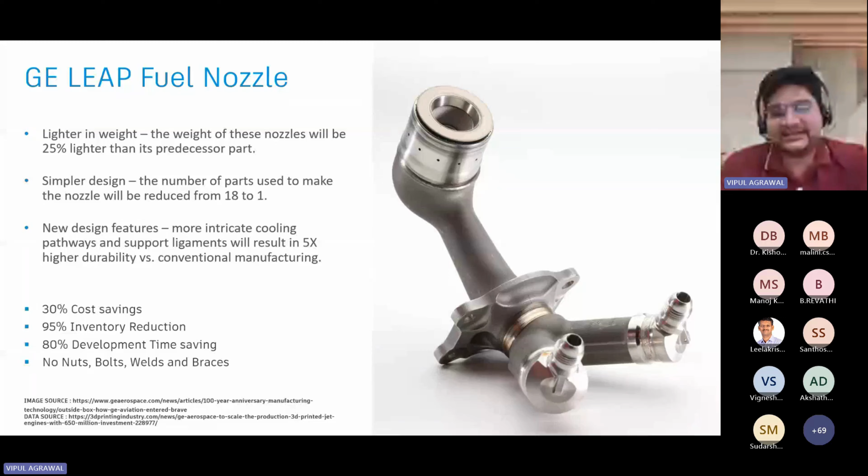And then that is where the industry started thinking about generative design. Industry started thinking about additive manufacturing, right? And at that time, I believe, in the mainstream, the fourth manufacturing process was added as a common manufacturing process. Every one of you might have heard about all the other three.

The casting process, which we say is kind of an additive process also, but it's just pouring molten metal into a mold. The forging process, which is the zero or neutral process, as we call it, which is just shaping the metal out of what you have. And then the machining process, which is the subtractive process, which takes out the material from the regular block. And then the new age additive process, where we settle the material layer by layer, right?

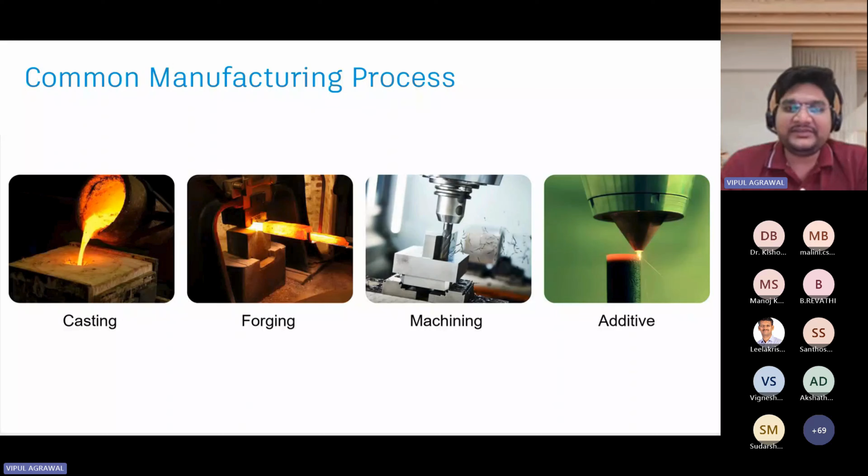And why was this becoming more and more aggressive and more famous in the industry? This is because of these five reasons which have been mentioned here. One was sustainability. Since you are not removing material, you're adding up the material, you're using approximately the equivalent material, and not wasting anything. This was again a sustainable move, and it was very much beneficial for the industry.

Shorter production lead times were there, the material usage was reduced, and the spare parts were reduced also. The performance of the parts was able to improve because now they could implement the designs in such a way that the new features, the new functionalities which were not previously possible, can now be manufactured. And then it was decentralizing the manufacturing from silos to the whole world. The manufacturing machines were the new age machines which were coming up in every industry.

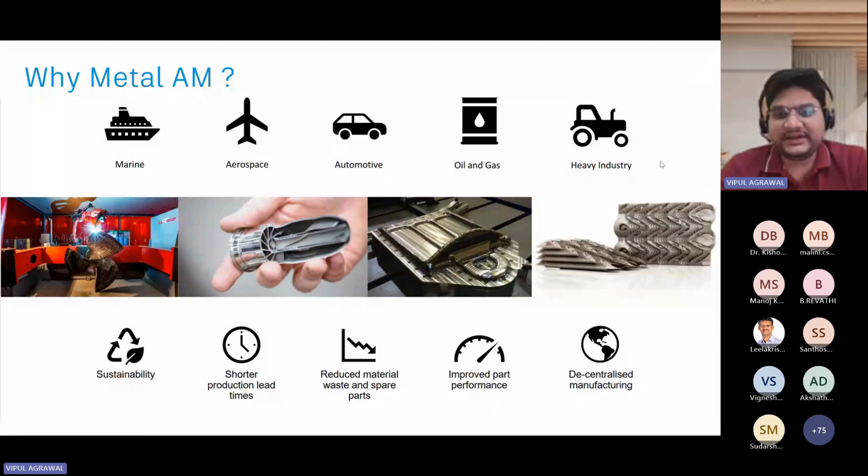Now, apart from this, if we look at the designer side of benefits, the designer was specifically able to produce more complex geometries, right? That would improve the part performance. They were able to make simple geometries which were combined together and not made in different parts. Again, the weight of these geometries was really low. They were fully customizable, and parts could be produced with minimal extra material or effort, like no tooling is needed, no fixturing is needed, and those types of things.

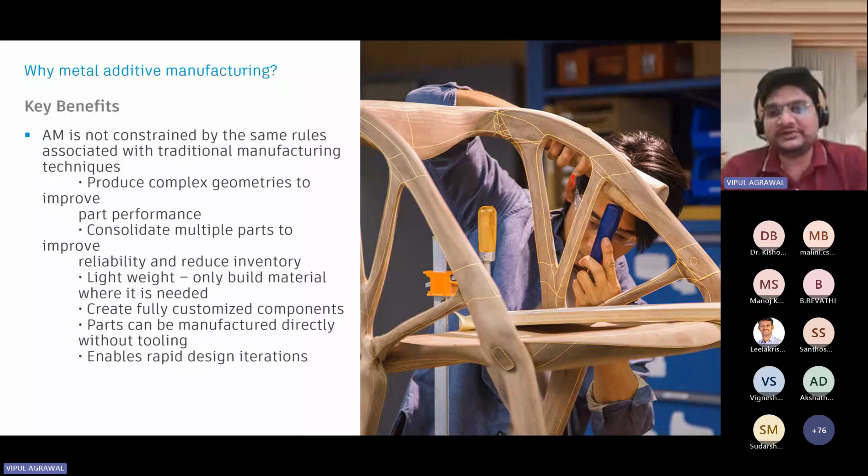And the other thing was you can do rapid iterations on it. These were the key benefits from the designer's perspective, through which they were able to make new and better designs than any time before.

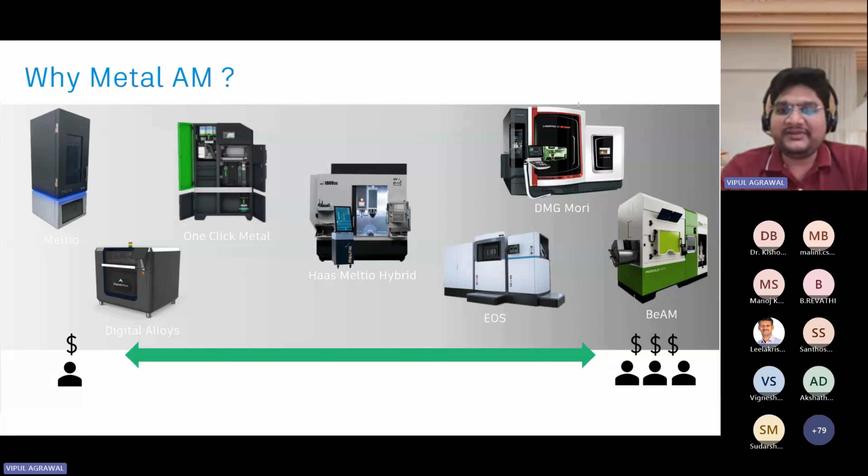And another thing was the era of making additive machines simple also got started, because previously the additive machines were bigger, bulkier, and costlier. While now, the additive machines have gotten smaller, desktop based, even some metal machines that you can install at your homes as well. So within these 10 years from when I was introduced to additive manufacturing till now, this makes right now a very good time to start working with additive manufacturing completely.

And what is required for doing it? So we saw the benefits and everything, but because of those benefits, because of those things that have changed, there is another new aspect that has come up: the designs are getting complicated.

And as far as a designer, while I have the flexibility to design it, I need new type of education, new type of goals, new type of understanding to make these new designs. And that is where design for manufacturing comes into picture. Once you have selected the process, the manufacturing style you want to adopt, now you design for it, and you have to specifically think in that direction, because that is what is going to get the design into real life afterwards.

And when we adopt design for manufacturing, there are again various benefits that we get, because the manufacturing has been thought of even before the starting of the design. The quality of the designs gets improved. The cost of getting the designs wrong or redoing them gets really low. So the costs are reduced, the qualities are improved, and due to this, the time to market of your products also improves.

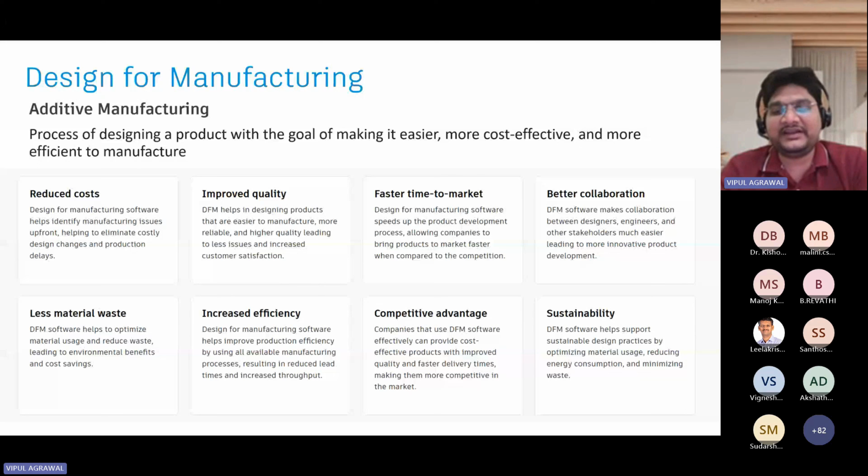And when we think about design for manufacturing in additive terms, there are basically three types or three styles of designing that come into picture. One is the standard topology optimization that I think most of you might have used till now. The second one is lattice structuring, and the third one is generative design.

So, in simple terms, topology optimization is getting to know what are the areas of the material where there is no use of any metal. So, it does a basic stress test on it. Wherever the stress is not acting, you can remove the material from there and optimize the topology.

Lattice structuring is where you can do a lattice structure for the inside of the part, so that it is fully solid from the outside but hollow from the inside, with some kind of structuring which can sustain the load cases which are already there. And then the third one is generative design, which we are going to see in detail. So let's start

now discussing how generative design would help you to do goal-based designing for additive manufacturing. But again, I'll repeat what Santosh has told: if you have any doubts, any questions regarding the concepts, or why we are discussing generative design and additive manufacturing, you can start putting them in the chat, and we will take them up at the end.

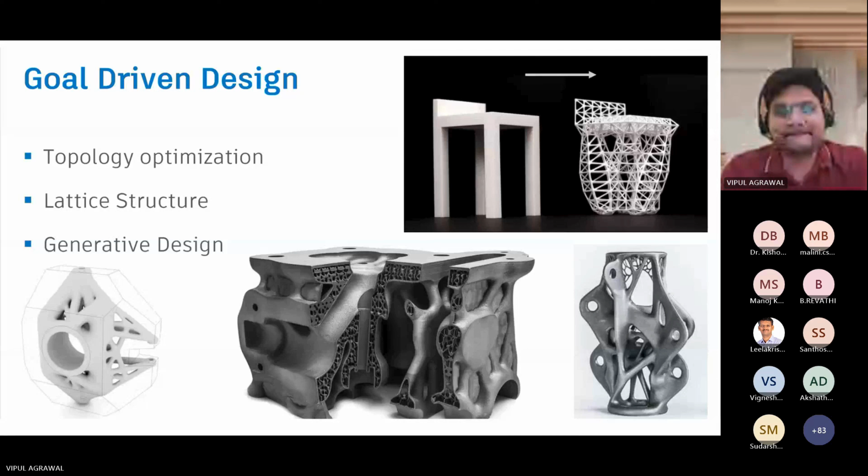So we heard additive, generative a lot right now, but what is it basically? Generative design is nothing but a design exploration technology. With the given set of inputs, it will give you CAD designs, and with those CAD designs, as a designer, your job would be to find the right fit for yourself. Now, what are these inputs and how are the designs presented? That is something we'll see.

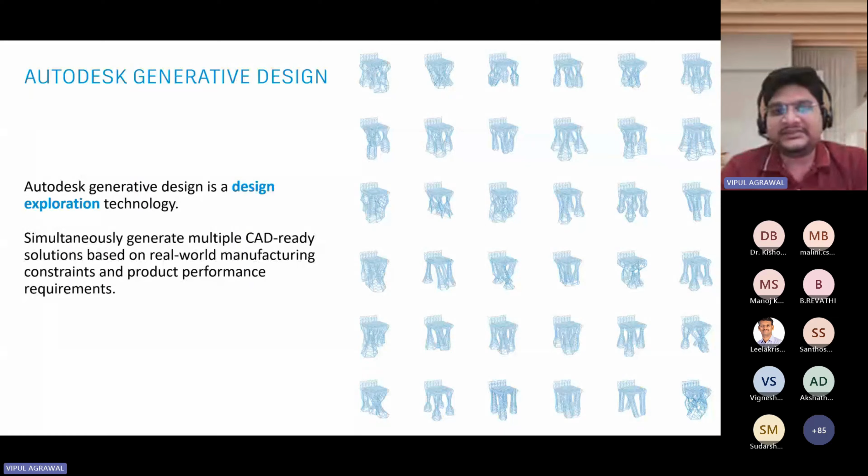But first of all, let's take a step back and see how design processes are done today. In the design process, a few concepts are made, and then these few concepts are validated. In this validation, they check how the performance of these concepts would be, how the manufacturability is, and everything. And once validation is done, they go for mass production.

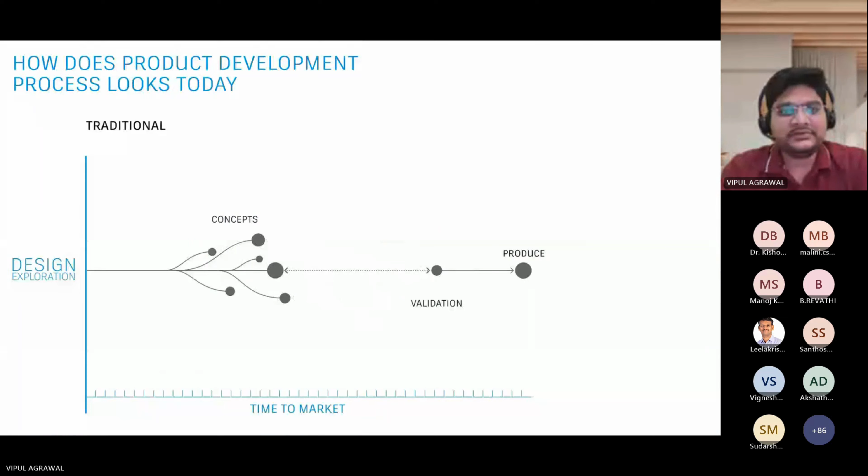A designer can design it in, let's say, 10 hours, 12 hours or something, and he or she can design only one design in that 10 and 12 hours. But what if there is something which can give you hundreds of designs within that 10 to 12 hours, right? And these 10 to 12 hours which the designer has invested will only be given to a design which is manufacturable by one method and made by one material type, right?

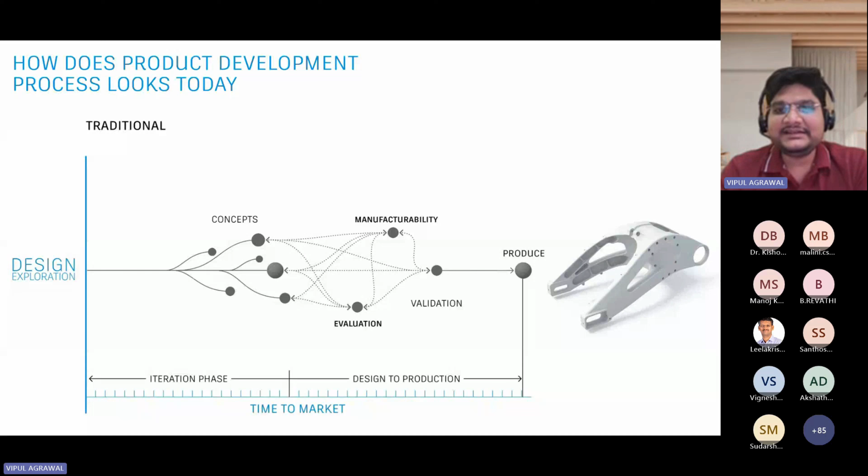What if the material changes? What if the manufacturability changes? What do we do about that? So that is where generative design supports you, right in the first iteration phase of the complete product development process. While you are doing the concepts, it helps you by giving you hundreds of different concepts with the given set of inputs that you have for the product development, and using these hundreds of outputs, as a designer, as an engineer, it becomes your job to go ahead and select what fits best for you, right?

So seeing this, there are basically four areas where generative design can be used. First is to get a design suggestion. Like, I'm randomly sitting, I need to do a design, and what kind of design can I take up. Second is part consolidation. So if there are several parts, like we saw in the example of the GE nozzle, 18 parts combined into one, and I want a combined part of everything.

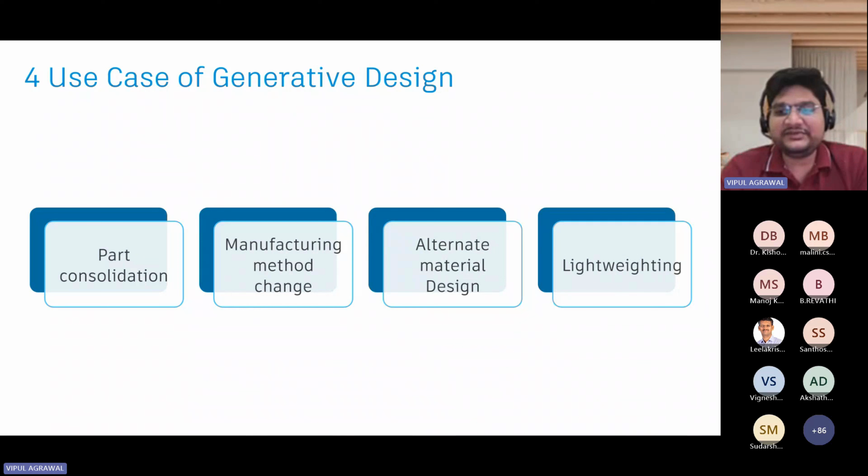One of the most important ones is the change of manufacturing method. Currently the biggest mistake everybody in 3D printing is making is using the same part which they used for subtractive manufacturing or any other type of manufacturing, and just 3D printing it. That is wrong. What you have to do is, with the use of 3D printing, whatever are the good aspects of designing, you have to adopt them, implement them in your design, and then do the 3D printing of it. And that's where generative design plays a bigger role: if you change the manufacturing method, it will give you the design according to what you want to achieve, like additive manufacturing, right?

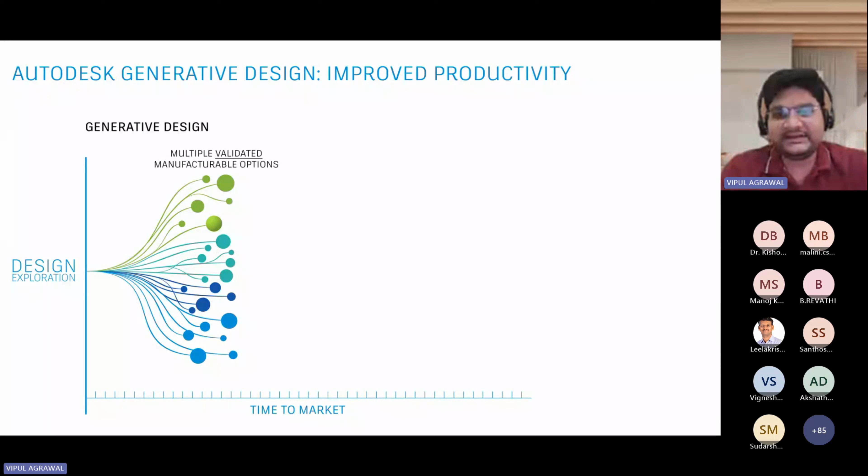So these are the challenges today. Oh, so the slides came up here. So this is what I wanted to show you. Generative design will help you iterate a lot of concepts at the main iteration phase itself. And once these iteration phases are done, you can decide from all the concepts, comparing cost, mass, application, and manufacturing processes, what is the best that you can use.

You can use a die casting option where the cost is low but the mass is high, or you can use a three-axis option or additive option where the cost is high but the mass is less. Now, if this is something which you want to produce only once, then it's better to go with additive manufacturing because the mass is very less and it is serving the main purpose. But if it's something that you want to produce in good numbers, then you might think of going somewhere in the middle, like three-axis machining. So this is where the real engineer's job comes in, and that is where generative design helps you out.

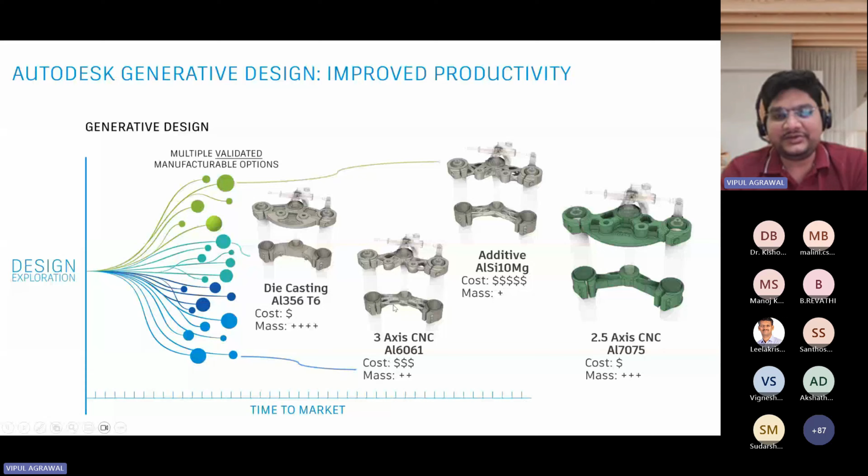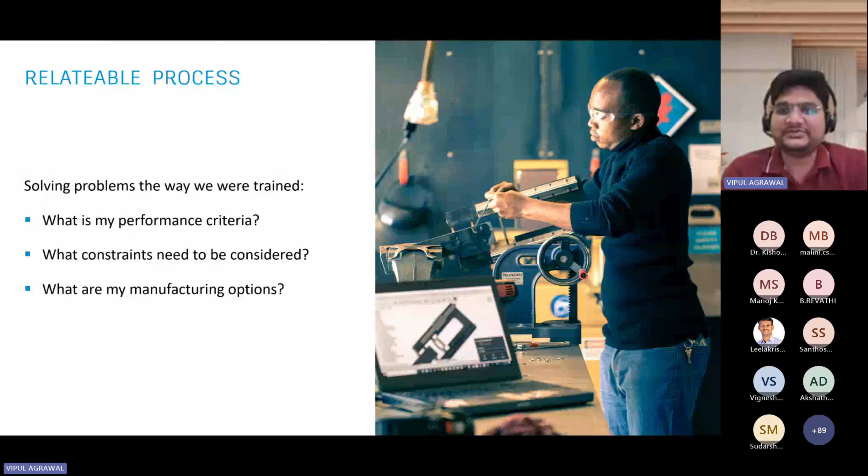So what are the inputs that we give to generative design? The first input is the performance criteria. What is it that the component actually needs to perform? The second one would be how it is fixed. Where is it fixed? What are the places where you want it to stay the same? You don't want anything to change because it is getting fixed into some other assemblies, right? And then what are my manufacturing options for it? Whatever manufacturing options we give, it will consider.

Right now we have multiple manufacturing options, but the most famous one is additive manufacturing. The reason behind this is we have been trained for hundreds of years to design components which serve other manufacturing processes. But the concept of additive manufacturing is different, and humans still need training for it. And also you have to have that additive manufacturing thinking beforehand.

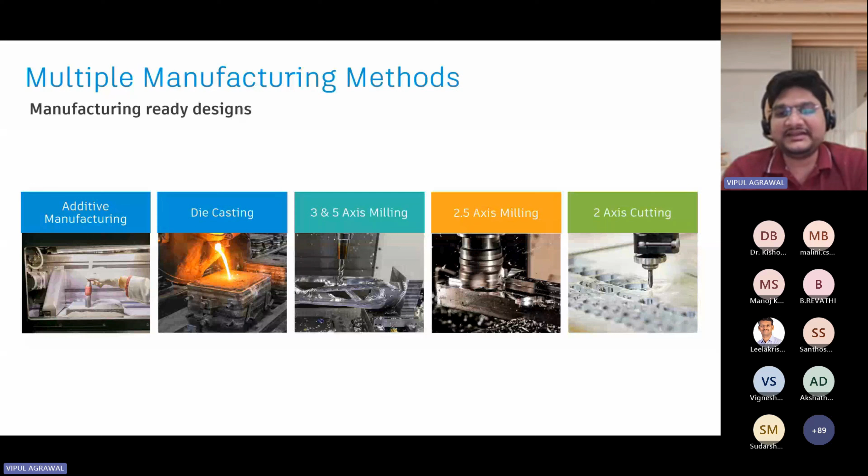And that is where it becomes more popular to give a software the algorithm to design for additive manufacturing, and then you just evaluate it. Now let's see how it gets done. So this is a quick video on how it would get done. So considering the bike

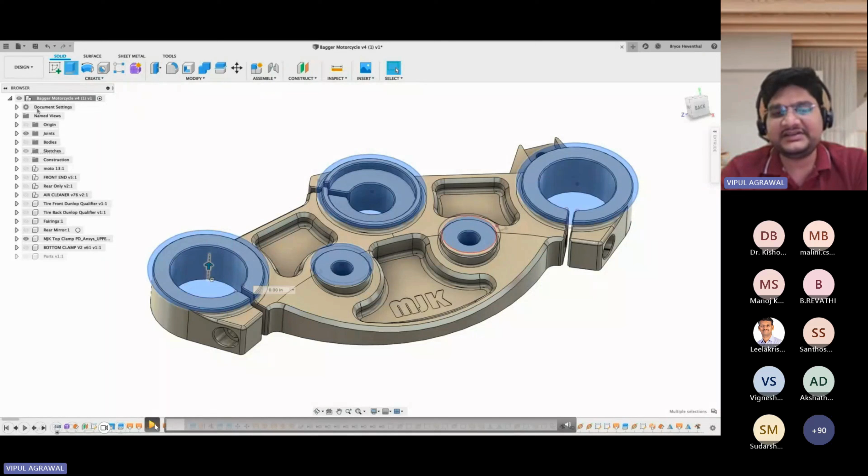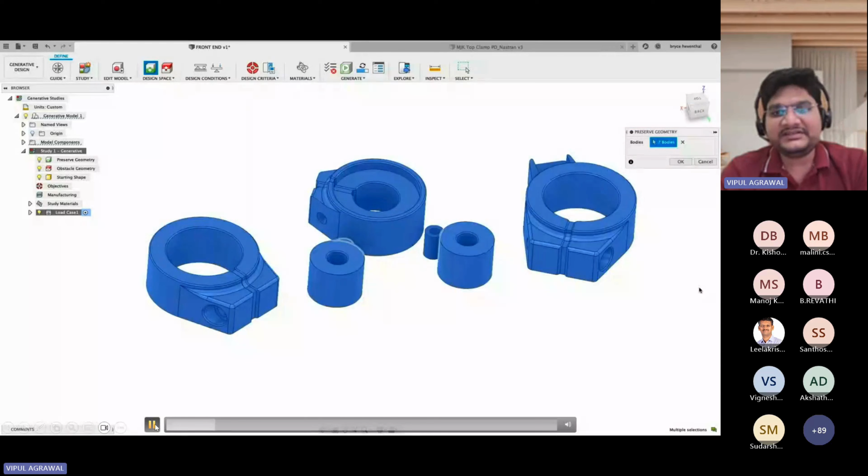In this generative space, we select the geometries and define them as preserved geometries because this is something which we don't want to change at all. This is something which is making this complete component connect with other components and giving us a complete assembly. So we don't want anything to change after this.

Once we are done with this, all the positions which get locked get constrained, and then we give the loading conditions to it. So whatever load is acting on that will be defined on this place. Now there are other options for defining these loads also, which is modal frequencies, displacement, global loads, local loads, and even vibrational analysis and buckling analysis.

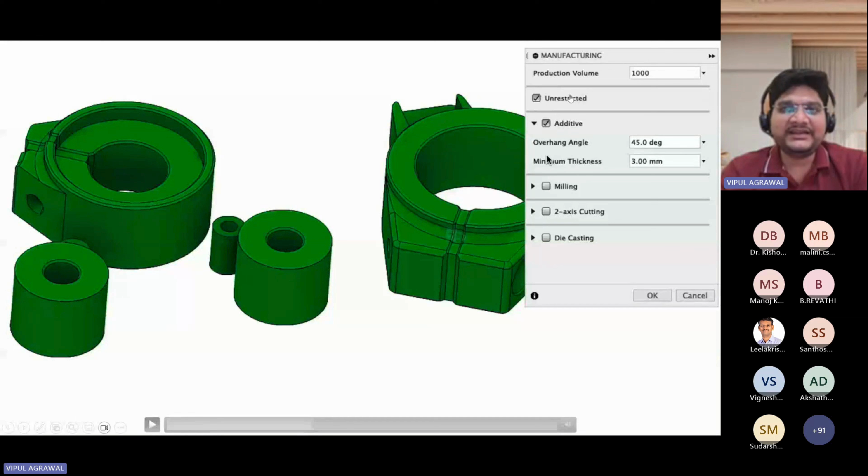Now comes the important part. How do I want to manufacture it? So here you can see there are two options which are very much useful. One is additive manufacturing, where you can give all the other details of additive manufacturing, and it will give you an additive output, plus an unrestricted manufacturing option. So the unrestricted manufacturing option would give you a complete organic design where this organic design can be further modified into

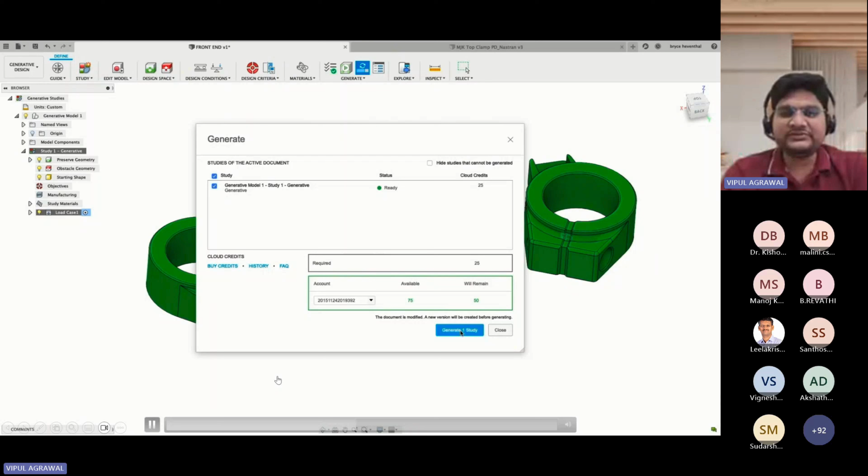doing manufacturing through additive. Now, once this is done, I hit solve, it goes to the cloud and starts solving. While it's solving, it will start displaying all the results which have been completed. And what you can do is you can start your analysis right after it. You can even create or filter out according to visual similarity.

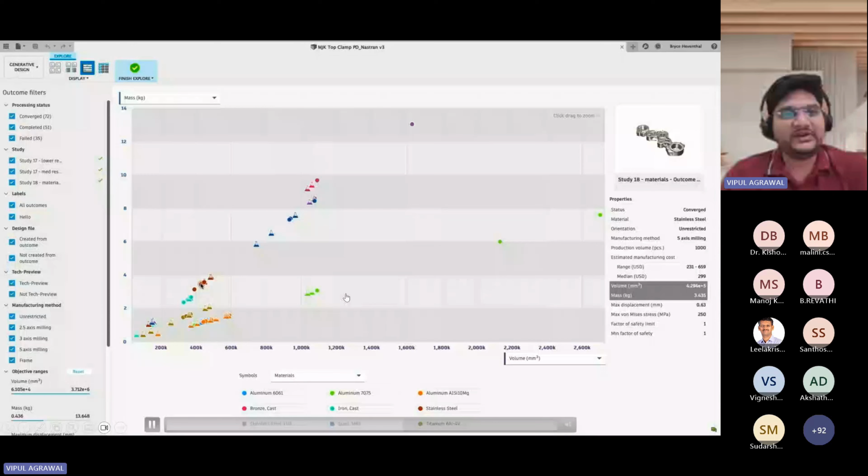You can create a graph plot out of it where you can again filter it out or find out which is the concentrated area you are interested in. And then all the results which interest you, you can take that out or go ahead and view it inside Fusion itself. Once that is done, you can use the manufacturing options to do the manufacturing.

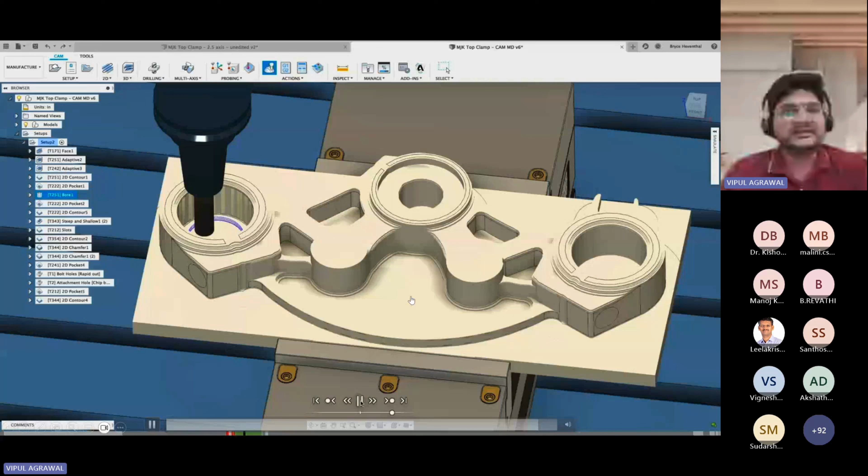Right. So this is what a complete basic iteration of generative design is. Once my presentation ends, I'll also take you to Fusion and show you a live example. Right. But before that, let's hear about some success stories. So there is a company called Penumbra, which is an engineering consultancy company.

Right. Now you'll see such an innovative design serving the same purpose and having the same strength. This could not have been possible if we had used a normal manufacturing method. Now we are doing it lighter, we are doing it faster, and even the product performance has increased a lot from this. So you can see it's 74% stronger, and the handle is very good, lightweight as well. Right?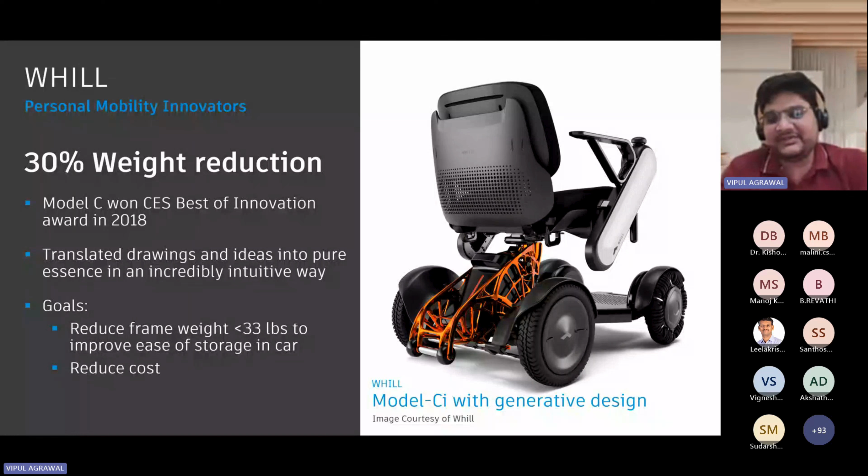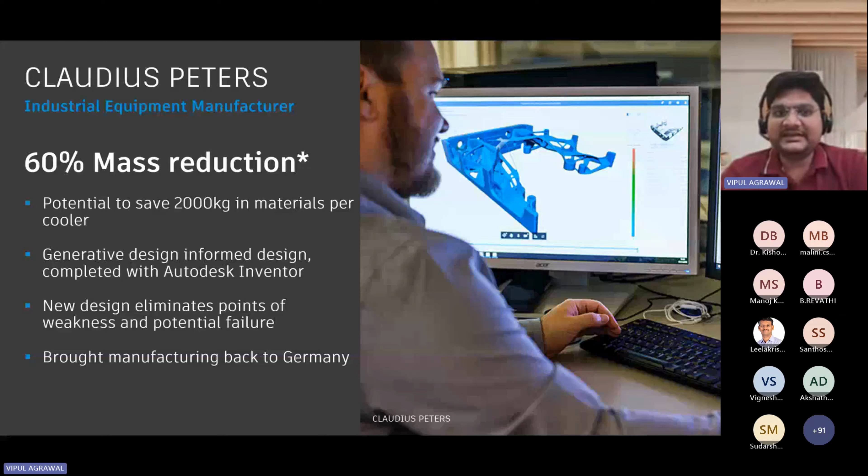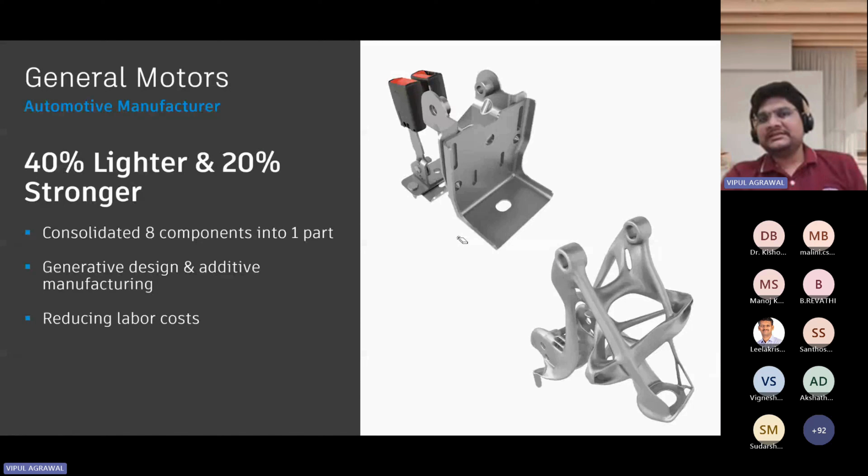Sorry, seat belt, and this portion is something which is hidden inside the back of your seat, so it is not something which is seeable, but it has its own purpose. And it was a complete unit of 8 components where General Motors decided let's do some research and try to change these things and get something more efficient.

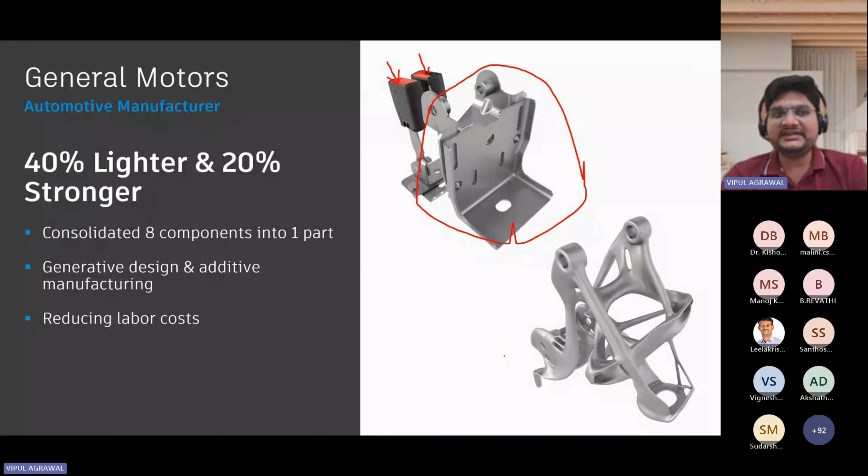So they used generative design and additive manufacturing in combination, where they redesigned this entirely and got 40% lighter and 20% stronger results. And this was the final result that was chosen, which they took into production actually. So it is changing the industry totally.

This is also something which you might have seen if you have ever traveled in a flight. There is always a partition between the crew members' working area and the seats. And if you have traveled in an international flight, even between business class and economy class, and between two economy sections, there is a partition area. If you have ever touched those partition areas, it's not completely solid. It has been made via these kind of frame structures.

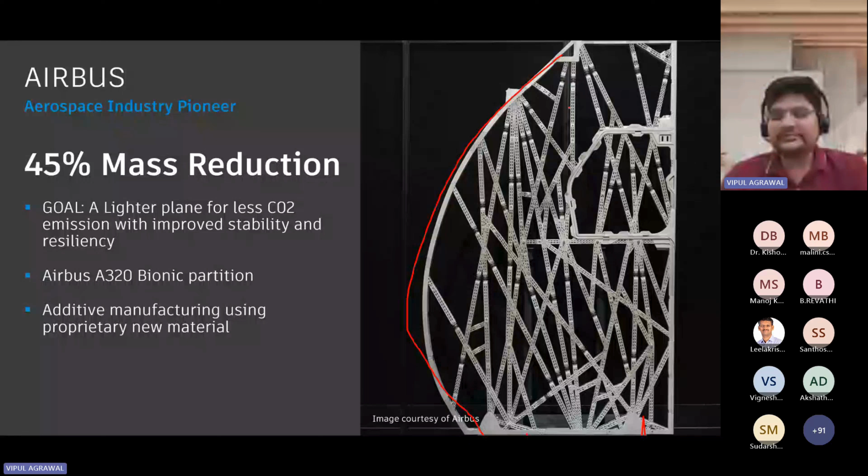Now, this again was designed by generative design using the additive technology, where it gave the complete sections or complete strength points where the strength needs to be added. And once receiving the strength points, all the connections which were there were standardized.

It was further 3D printed, and then those standard 3D printed sections were fitted exactly at the same points or locations as given in the output of the additive manufacturing generative option. And once they had this, it became a full-fledged structure looking standard, but behaving the same as the previous full solid partition.

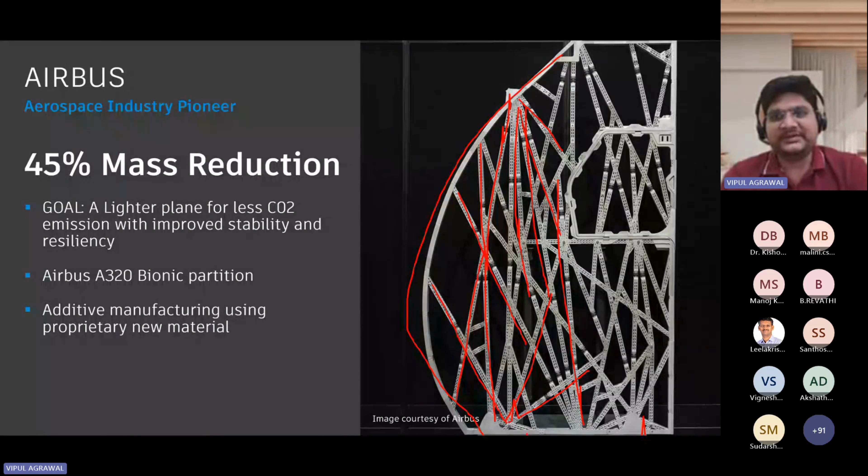Now, if anybody might have a question about how it is different - people might have used topology optimization earlier, and there is always a question I get: how is it different from topology optimization? So let's see how it is.

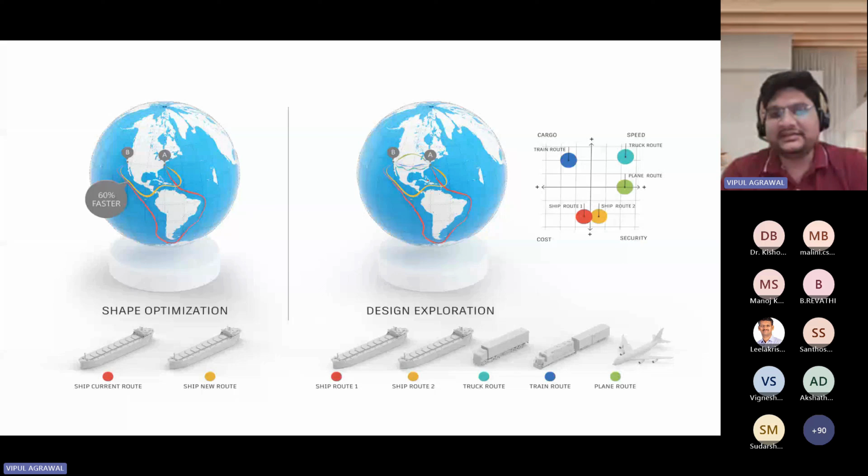While what generative design does is the main aim is to transport goods from A to B, and the second aim is to transport goods at the most efficient, least cost from A to B. It will try to find out all the alternate routes - it can be a ship, a truck, a train, or a combination of all of this, where you would be able to transport the goods from A to B in the cheapest form. So that is what generative design is also doing, with the aim in mind that these are the given design inputs to me. It is designing for whatever your main aim is, to get a very efficient and easy design, not just digging out the material from the standard designs.

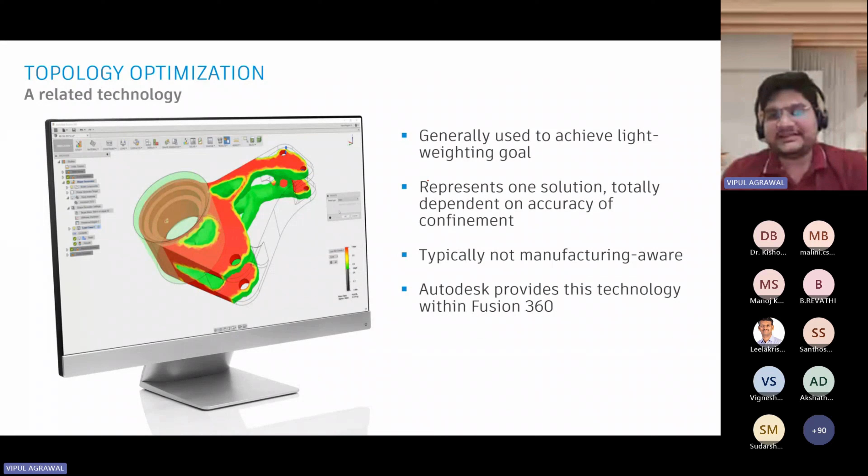So this is basically, yes, a related technology, but not the same as generative design. A few more comparisons of generative design with topology optimization: one is, topology optimization requires an expert, while generative design requires only inputs, and once you have all the outcomes, you just have to select the best option.

Topology optimization is typically for light-weighting goal only, while here I showed you there are four different ways of looking at it - change of manufacturability, change of material, consolidating parts, all those things. Topology optimization only gives you one result, while generative design will give you all the alternate results that are possible for the same given inputs.

Topology optimization is not manufacturing aware - all the designs need to be reworked for making them manufacturable. While in generative design, the manufacturability of the complete design has been taken care of.

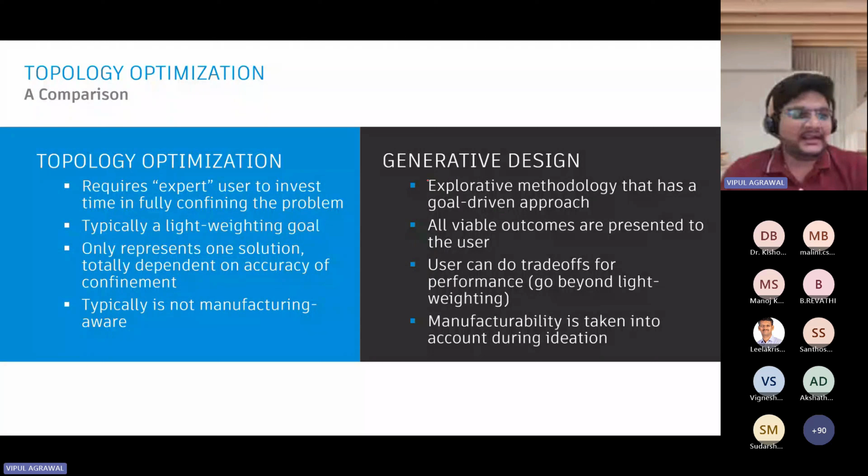Right, and I think this is my last slide. So what it is doing right now, it's not a replacement. Somebody might ask - and I get this question a lot - do you think generative design will replace the human designer from his desk? The answer is always no, because generative design is not a replacement, it's a support, it's a complement to what designers are doing. The final work that designers do cannot be replaced by any process, because that needs very detailed analysis which only a human mind can do.

So it's an engineering efficiency design exploration tool that documents the situation and all those things. But the main crux here is that it doesn't replace the designer. It's just complementing the designer to make more efficient designs, or select from a given set of designs the most efficient one for his or her use case.

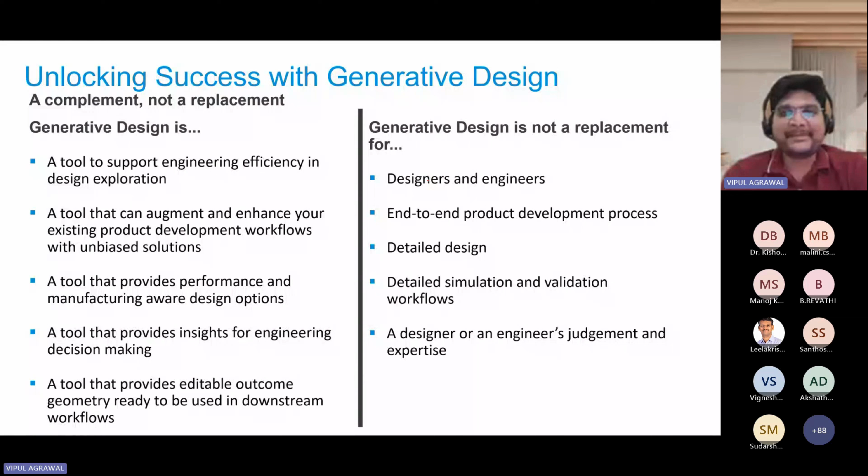If you are thinking whether this is the right thing for you to adopt - if you want to improve your product performance, improve your productivity and innovation capacity in engineering, win more business, or reduce cost or weight - if the answer is yes, then additive manufacturing and generative design are two technologies which are in great boom and have a lot more capabilities than we can explore. And if your designs have load carrying requirements, performance requirements, and potential to be manufactured with different materials and processes, then this is something you should consider.

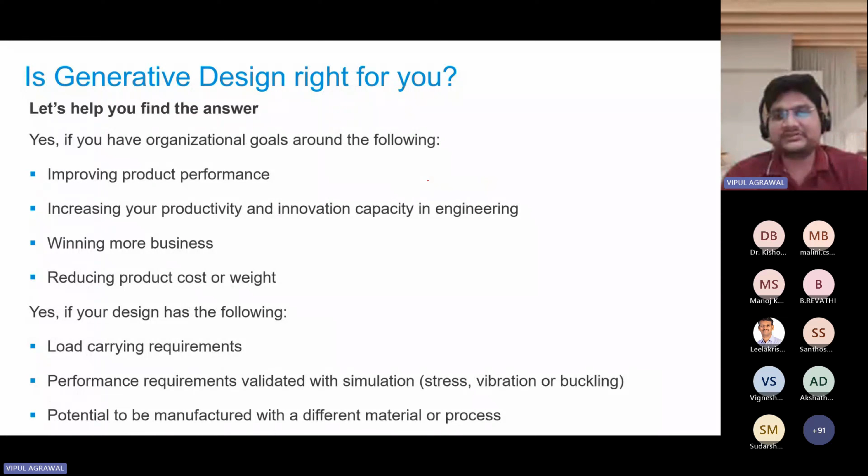Right, so before going to the question and answer, I would like to take you into the platform and show you.

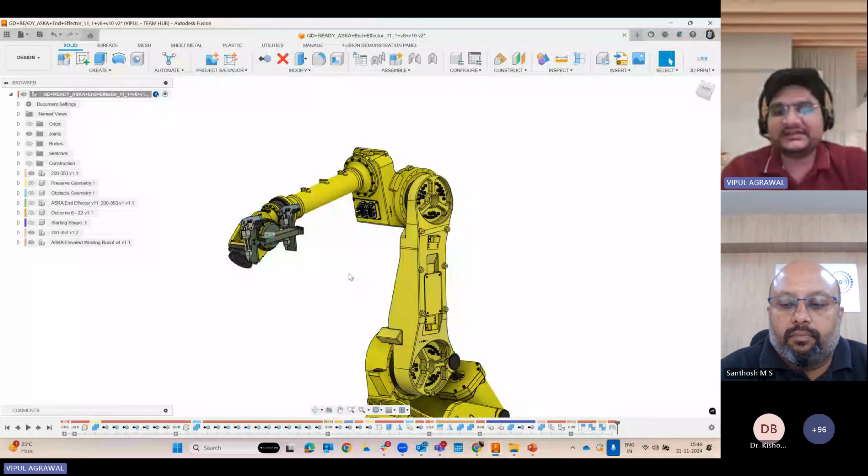So consider this robotic arm. Now, all the other units are standard, but the gripper is something we're interested in. This is the standard gripper available inside this robotic arm, and I wanted to change this to a design where I can use additive manufacturing for it.

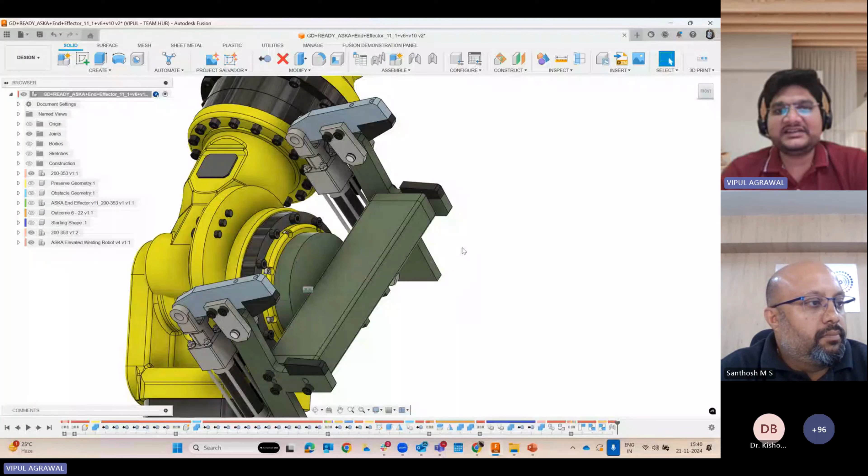So what we do is within Fusion, I just go to the generative design technology, and these are the inputs that we need to give it. Basically, the yellow portions are the starting designs. Since I already had a design, I gave it as a starting shape so that it can take inspiration from that.

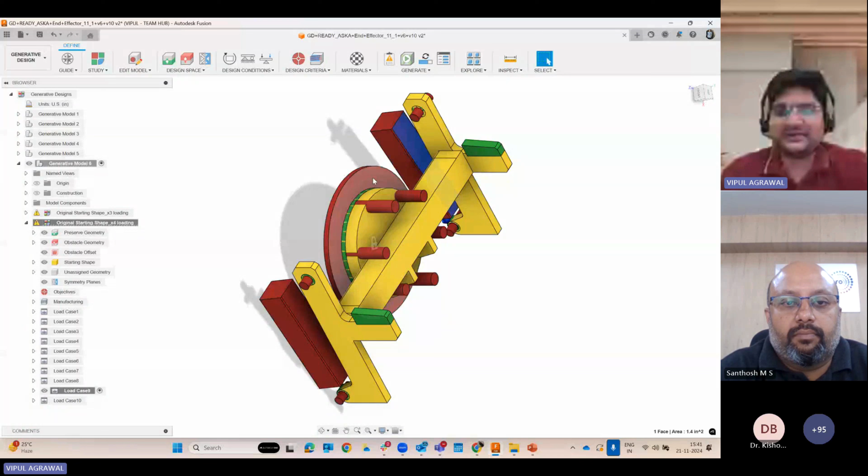These are the obstacle geometries, because these are the components at the back end of it, where we do not want any other material or hindrance between these things. And then these are the preserved geometries which we want to connect.

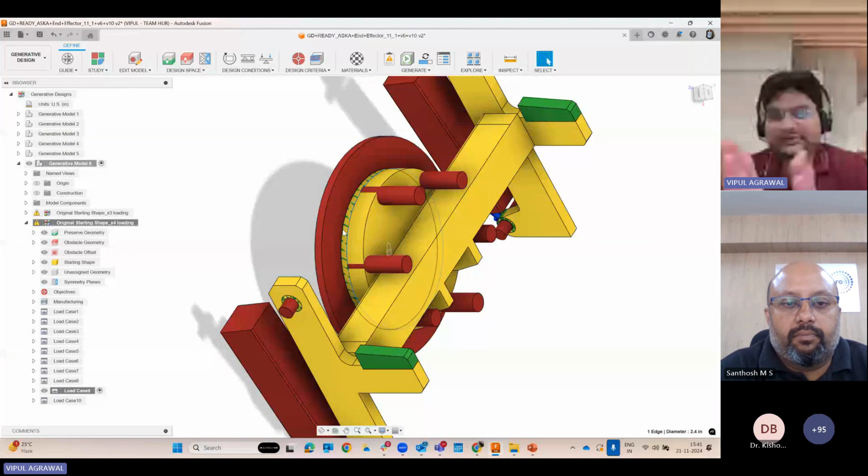So essentially, it's just a back plate which sticks to this obstacle geometry so that we can join it together. And then these are the two ends of the gripper which we want to use to grab things and pull it out.

Once I give these inputs plus my design conditions - I have different types of loading conditions that can be applied, different types of constraints that can be applied - all these things can be given as a basic input, the design input of it.

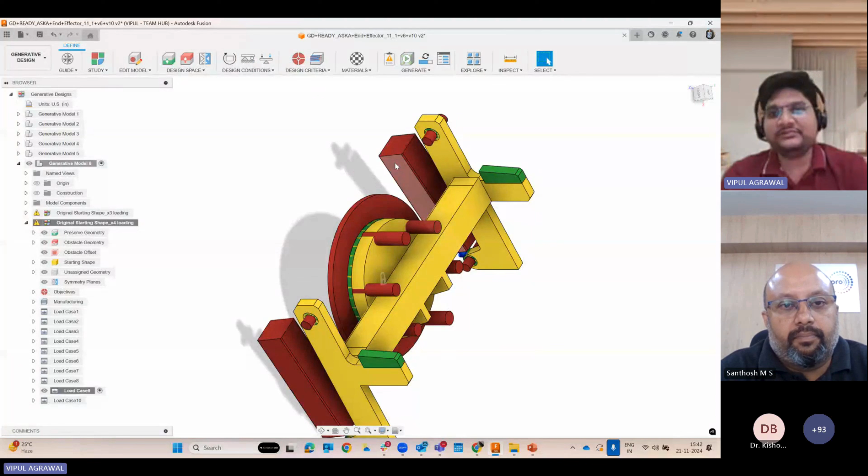And then I start giving my requirements to it. What is the factor of safety that I want to maintain? Should I maximize stiffness with some given mass target? Let's say I want to do it 3 kgs. Do I want it to sustain some vibration? Do I want it to have limited displacement? Do I want a buckling factor included in it? These are the design requirements that I can give, one or a combination of all of these.

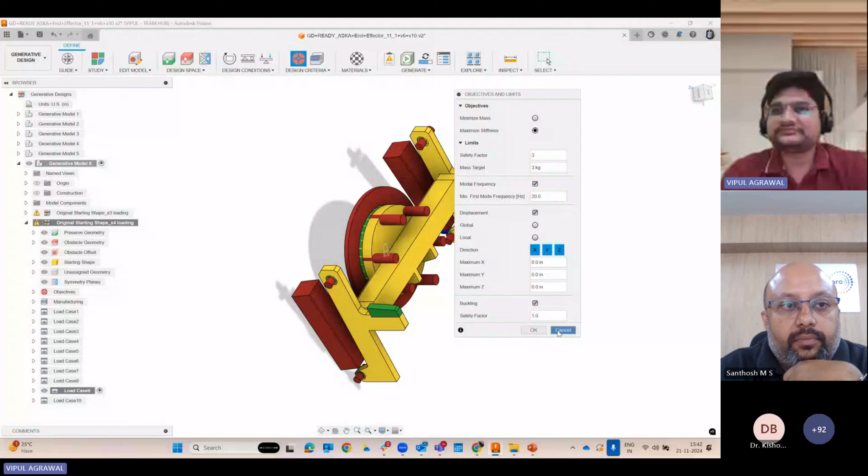Then what are the manufacturing methods I want to use? Unrestricted for a very organic design, additive for a dedicated additive design. And then we have other manufacturing methods available also if you want to test that too.

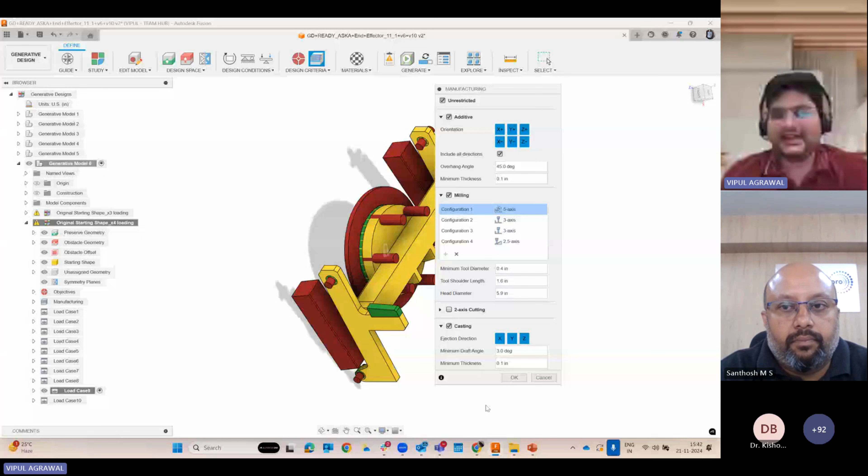And finally, the study materials - what are the materials which we want to use. This uses the basic mechanical properties for a particular material. So we can just go and add the material. Now, once I do this, click on generate, it will go ahead, send this to the cloud and start solving.

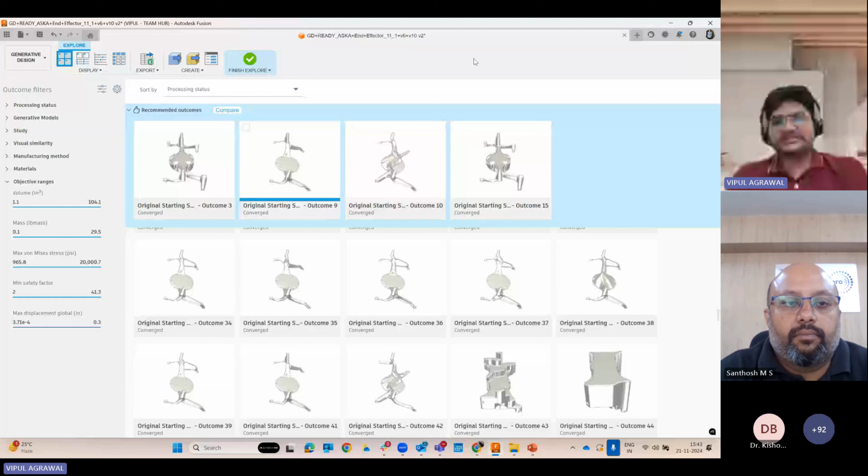The results, as soon as they are generated, will start displaying up here. Now, this is something I kept solved, and you can see there are hundreds of designs which we were able to solve, and it shows me everything according to that - failed, converged, generative models, studies. So I can filter out from these options as well.

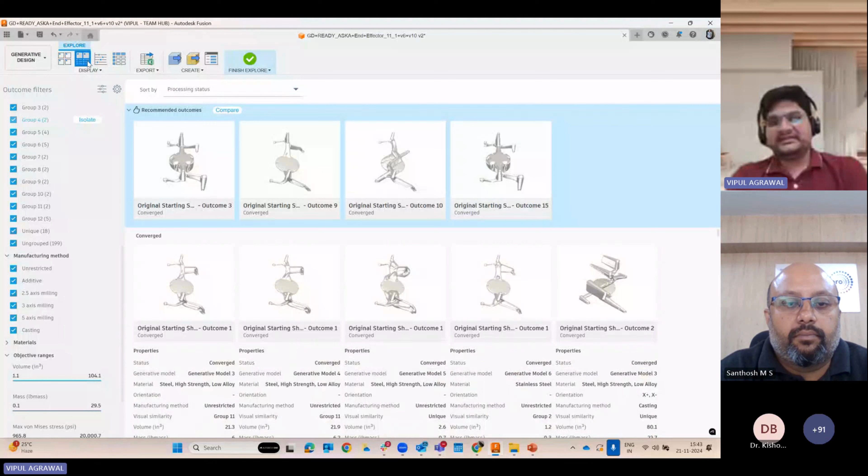And I can create a detailed view, a scatter plot so I can see. Here, this is the concentrated area where it has very less mass, but that is stainless steel. Now this is the area with a decent amount of mass, and it's a high strength steel. While these blue regions are where the factor of safety is too high.

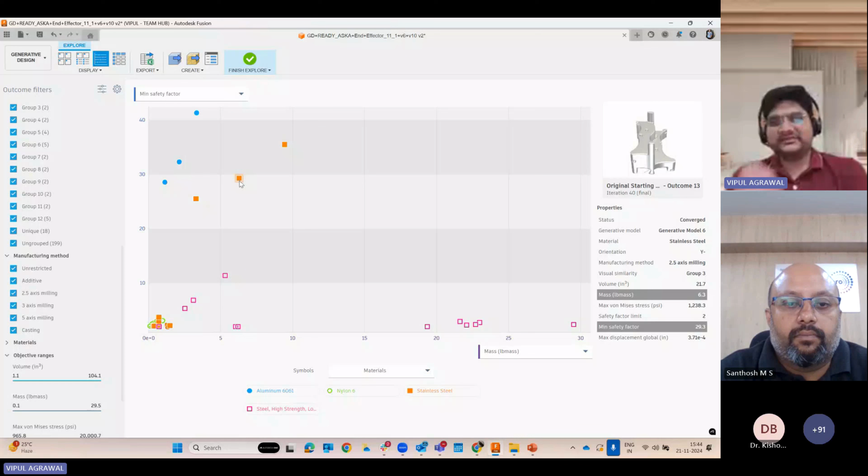So it doesn't make sense for me to go ahead and take a component which has a factor of safety of 30 or 25. So I can just select the appropriate design and maybe open it. Once I have the design, I can go ahead and convert it and bring it back into my original assembly, and it would look something like this.

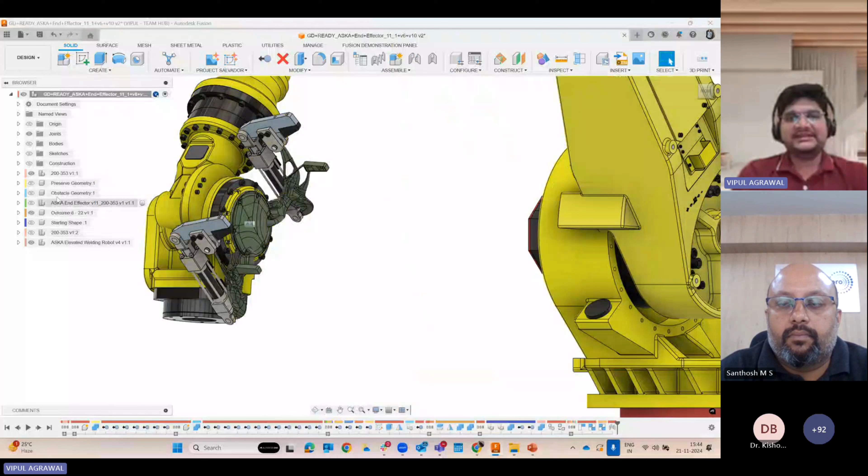I did all the pre-work here, and you see, this is how the gripper would look like. It's again aesthetically very good looking, fits really well, and you can manufacture it by additive manufacturing.